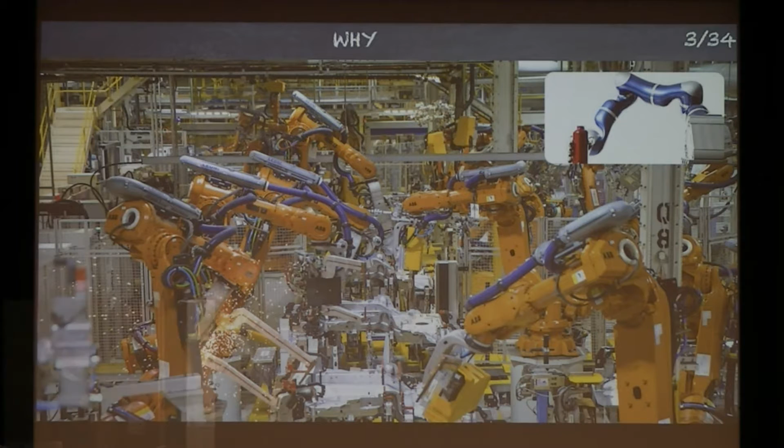Just a little bit of motivation. This is very standard and straightforward. Robots were designed to be outside the human workspace, confined within cages and with no people around.

But nowadays, the European community has been certifying a number of robots that can really be installed nearby humans, and we finally share with robots the same workspace.

But still, I think there is a lot of research to be done in order to give robots the ability to be proficient in interacting with humans.

On one side, we need robots able to interact with the environment in a better way, to be able to establish contact in a better way.

But this, I think, is just a way to really obtain robots which are able to physically interact with humans, so that they are able to establish contact with humans in the right way.

And the number of applications, if we solve these issues, are several. I want to cite a few because my approach is a little bit theoretical, in the end, so I think I can decline what my research does into different contexts and scenarios. I sketched up a few there.

Physical nurse, physical assistance from a nurse. I think it's very important considering also aging population.

Exoskeletons are something that are very popular nowadays, and I think that what they lack right now is the ability to physically interact with humans in the right way.

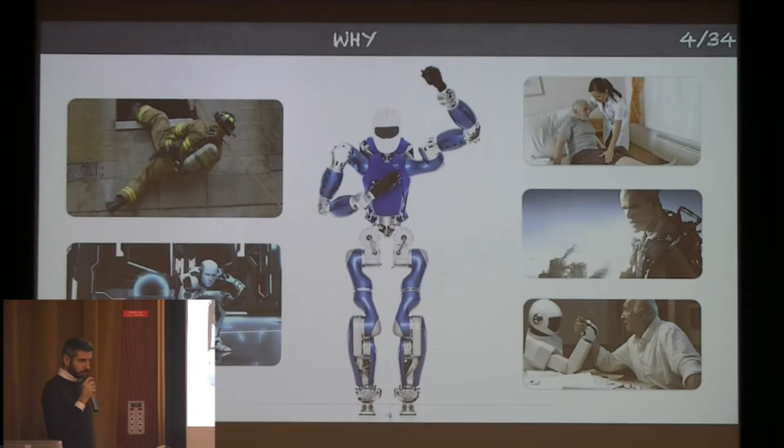And in general, interaction with humans might be the future for a number of applications that at the moment are not possible for a number of reasons.

As a scientist, I've been always fascinated by how humans interact with the environment. The interaction is never pointwise, as opposed to robots. It's actually distributed on an entire surface, and it's flexible, dynamic and compliant.

If you see what happens when you basically run, the interaction with the ground is really complex. As I said, it's compliant, it's not pointwise, it's actually distributed over a surface. The distribution of pressure is very different.

When we interact with the environment, we adapt our control action to the specific environment we interact with. In this case, with flexible trees, we adapt our compliance, our way of moving.

When we interact with humans, it's even more complex. We need to understand what the other person is willing to do. We need to anticipate what the person is doing, and then we need to adapt our control action to this. I think all of this is the core of my research. It has been so far, and it will be in the future.

As a control theorist, I've been always fascinated by how humans are able to control a mechanical system which is very far from what we have in humanoids right now.

Humanoids are very fast. They have feedback loops of 1 kilohertz, even more, 4 kilohertz sometimes, which is definitely much faster than what we have in humans.

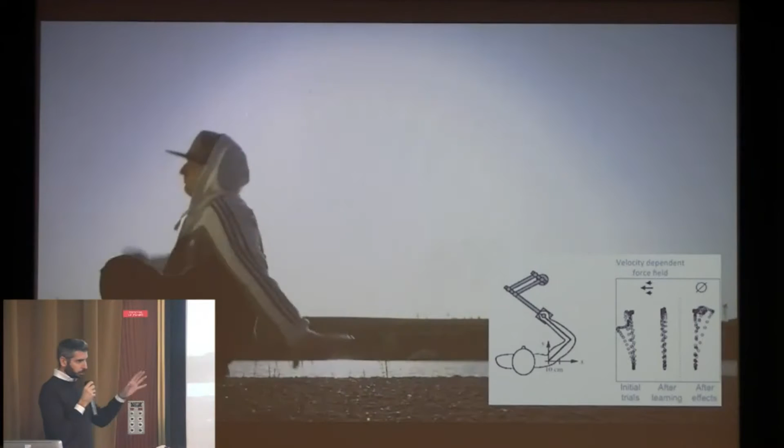And in particular, I have been reading several times a paper by Sandro Mussa-Ivaldi on adaptive strategies.

On the idea that we continuously adapt our models of the environment, and if we change these models, so if we perturb the dynamical models we are immersed in...

...we basically change our feed-forward control strategy. And this allows us to be more efficient in dealing with delays and being able to cope with uncertainties.

Another important mechanism, presented nicely by Burdet, is that we also change the compliance of our body. This might be a way we use to interact with the environment proficiently, and also to cope with very unstable dynamics. These kinds of results are at the core of my research interest.

The main topic of my research is exploiting dynamics. There are things you cannot grasp if you just look at the kinematics of a movement. This might be trivial for some, but not in general for the robotics community. If we want to be energetically efficient, we need to exploit the passive dynamics of the system we're controlling. Dynamics describe things that otherwise are not visible, like exchanges of forces.

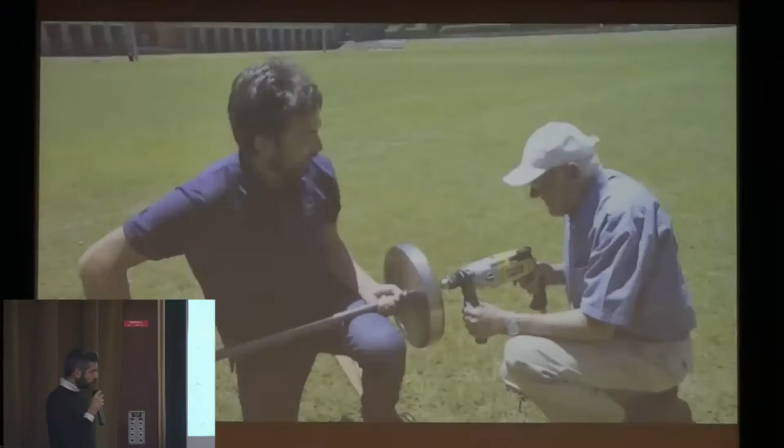You have very nice properties in dynamics. This tough guy is not able to lift this up. But if you just give some momentum to the wheel on the front, you get a very interesting property: the conservation of angular momentum. So this skinny guy is able to do something the other guy was not doing.

What is interesting from a robotics point of view is that if you add inertia wheels inside the robot, you get even weirder behavior. You probably know that a cube is able to stand on a single vertex just with inertia wheels. If you think about humanoid robots with many degrees of freedom and a complex distribution of mass, you can get really weird behavior if you exploit these basic principles.

But these principles are not that easy to see in a complex system like an articulated rigid body system. So in general, I like to think of my research as trying to understand and model the interaction between two agents. That's a very broad and general topic of research that can be specified in different situations.

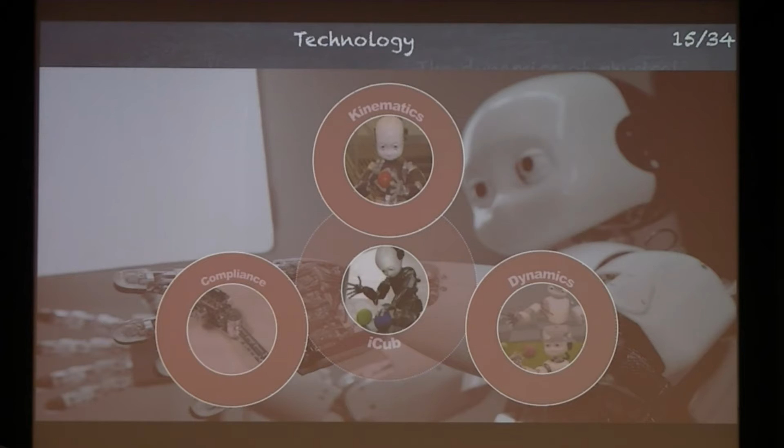In terms of technology, I've been developing the iCub, the humanoid robot you see over there, and I've been contributing to different things. At the beginning, I was mainly concerned about kinematics, the ability to plan movements in the kinematic space. But very soon, the community switched to the ability to control the dynamics of the system, the ability to control forces of interaction, and I've been contributing to it. More recently, the idea of compliance also changed the robot such that we could have compliant actuators in the system. Since the iCub is an open source platform, it's changing continuously, and it's really adapting to the need and to the new ideas in the research community.

I will be very brief on this. I've been working, as I said, on kinematic software that is able to do real-time inverse kinematics on the whole body of the robot.

In terms of dynamics, I've been working on developing techniques for estimating in real-time the forces of interaction and the internal forces, the torques applied by the robot on the environment, the forces applied on the environment, and the torques applied at the motors, and using them to get active compliance that you see represented here.

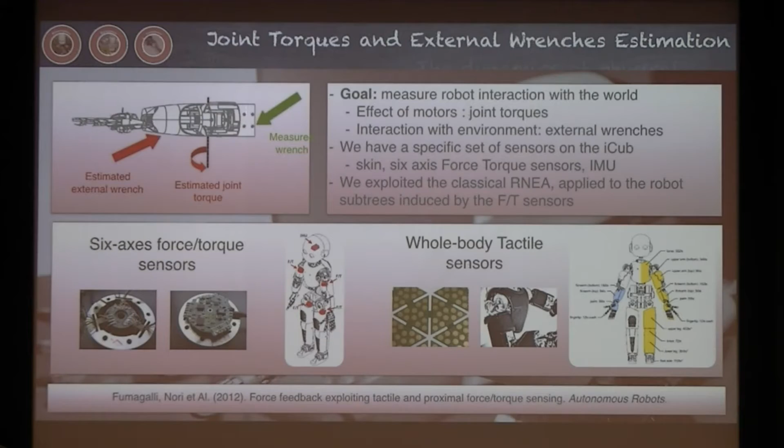We have more or less 6,000 taxels, tactile elements that allow us to have a full description of the interactions. You see here a representation of this capability. The robot is covered with skin, and whenever it's touched, the corresponding area lights up. Whenever Andrea here touches the robot, an arrow represents exactly the force applied on it.

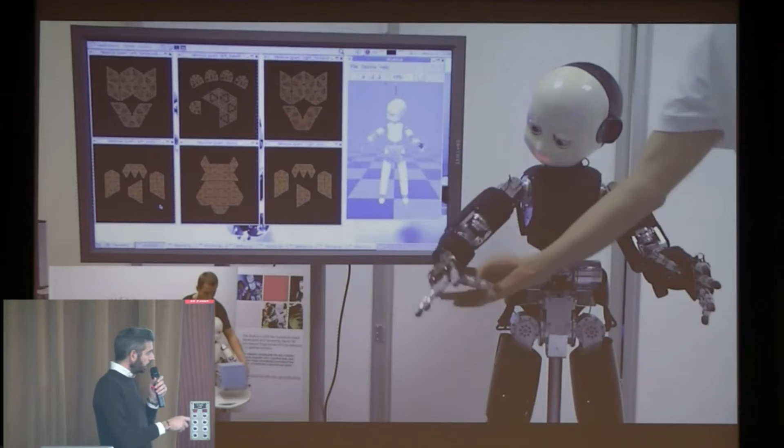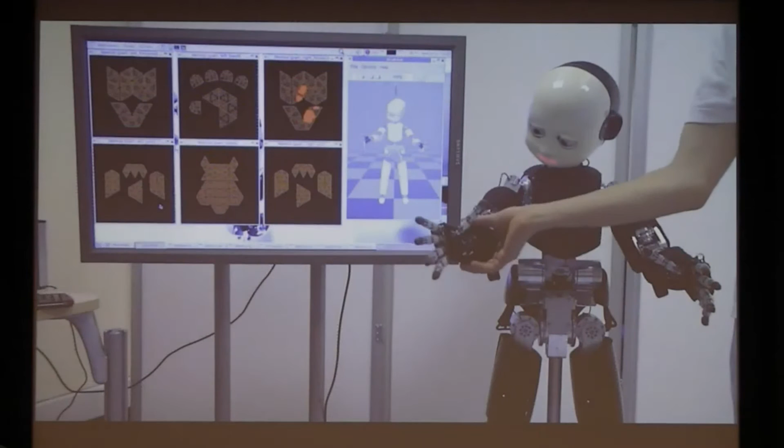We also compute not only external forces but also internal forces, the joint torques. By doing active compliance, we can regulate the force of interaction—in this case, a zero gravity effect—so we are compensating for gravity and letting the robot float as if it has virtually a very small mass.

In terms of software, we've been working a lot with other departments in IIT. I've been working on software for modeling and simulating articulated body systems, and interfacing them with different software. I'll be very brief.

We developed a simulator on Gazebo that allows you to simulate different robots. Another important piece of software estimates the external forces on the body of the robot. It's important for us to interface this software with a number of different platforms, in particular MATLAB and Simulink, which you see represented here.

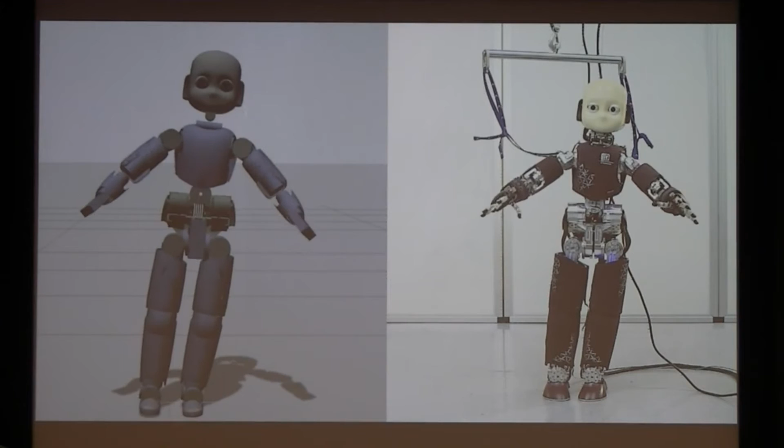Just to give you an idea of what we've been doing, here are recent results on inverse dynamics control of posture, simulated and on the real robot. On the left-hand side, you can simulate this yourself—go to the website, follow the instructions, and you should be able to run this simple demo on your PC. The other one requires an iCub, which is sort of expensive, 250,000 euros, so it's not that easy.

But you have one here, so you can see these demos in these days, because there is a version of the iCub here in Toulouse today, since there's a review meeting of a CoDyCo project next week.

In terms of science, I'll again be very brief, but my research interest is guided by control, and I've been working on modeling articulated systems, controlling articulated systems, and estimating articulated systems.

In the history of my research, I've been working on dealing with rigid contacts—the idea of having an articulated system interacting with a rigid environment. Going back to the equations, same as before but simplified, I'm considering only the robot interacting with a rigid environment, a very simple case that nowadays we can solve. The results are represented here.

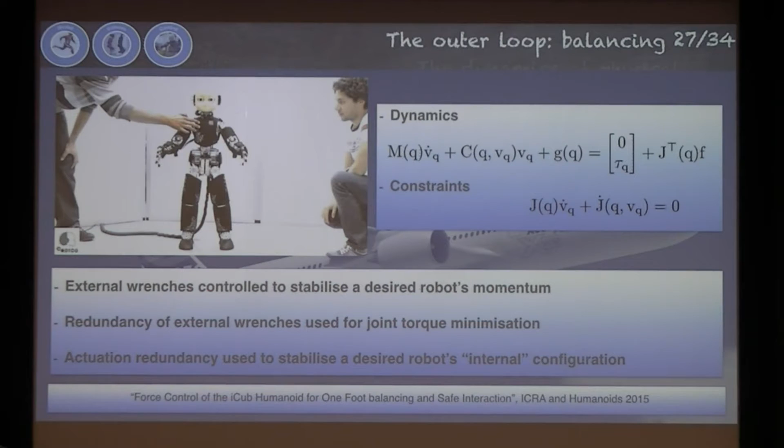I will have a video. Also this one, probably can start—let me see. No? Oh, yeah.

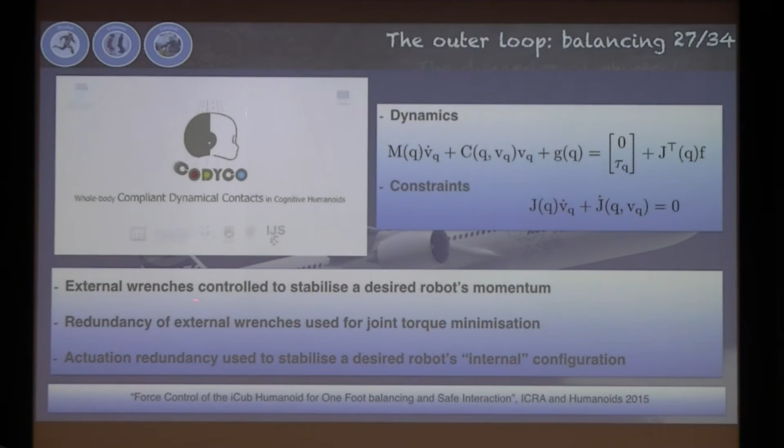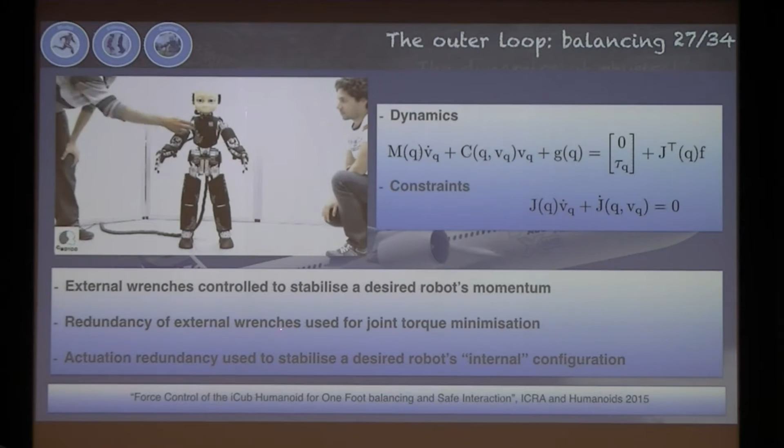The idea is to have hierarchical control. You first control the external wrenches, the contact wrenches, in order to stabilize the desired momentum of the robot. The redundancy of this task can be used to control the posture of the robot, and finally the remaining redundancy is used to minimize and stabilize the desired internal configuration.

You see, as you start doing fast movements, you begin to see the exploitation of basic dynamic rules, like the conservation of momentum, in this very simple example.

This is just to show you that now we have very fast and dynamic movements. We'll see the same video again, but this is kind of fast, in my opinion. I bet I'm not able to do this myself—I can try, but I will fall down.

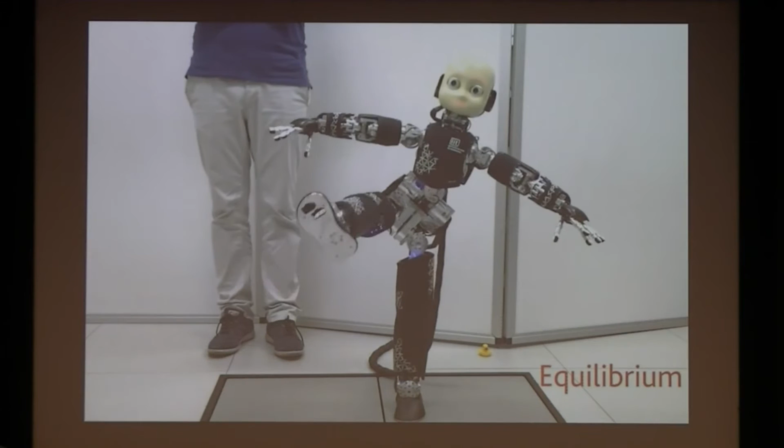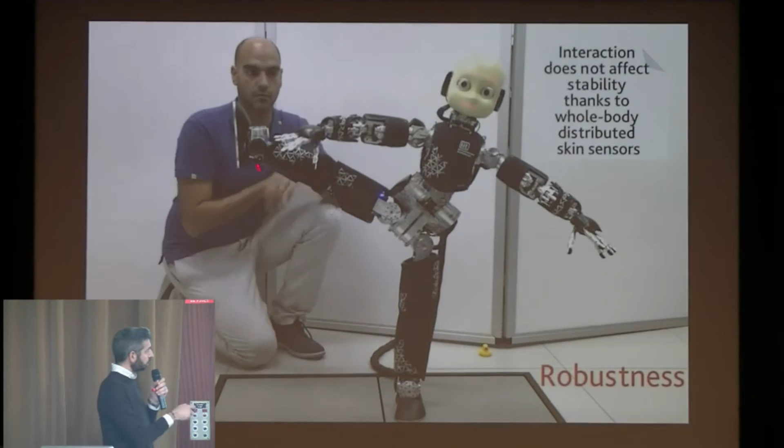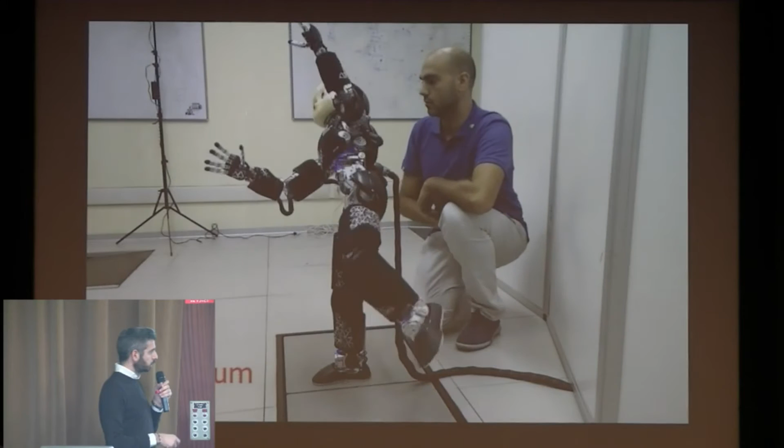This is fully torque controlled. You'll see that when the robot stops, Daniele in the background will push him, and because the robot can detect whole-body distributed contact forces, it's able to maintain balance by including in the control action the effects of the forces Daniele applies. Equilibrium is maintained by estimating the interaction force and using it to control the centroidal dynamics of the robot.

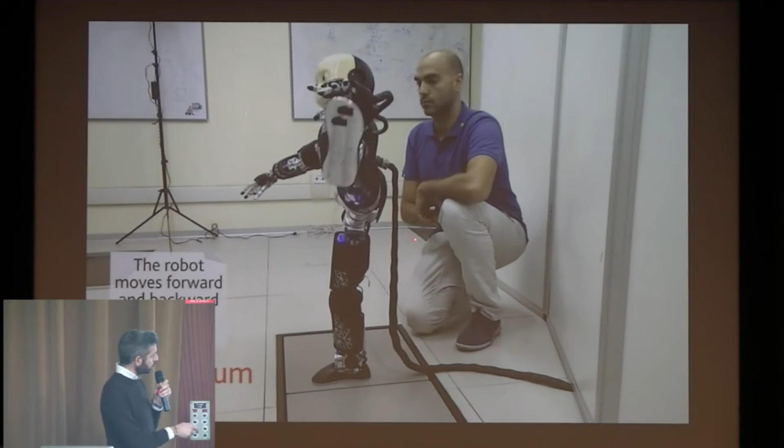In practice, this means controlling the position of the center of mass plus the orientation of the whole structure. You see a nice compensation: when the foot is brought forward, the upper torso is brought backward in order to maintain balance.

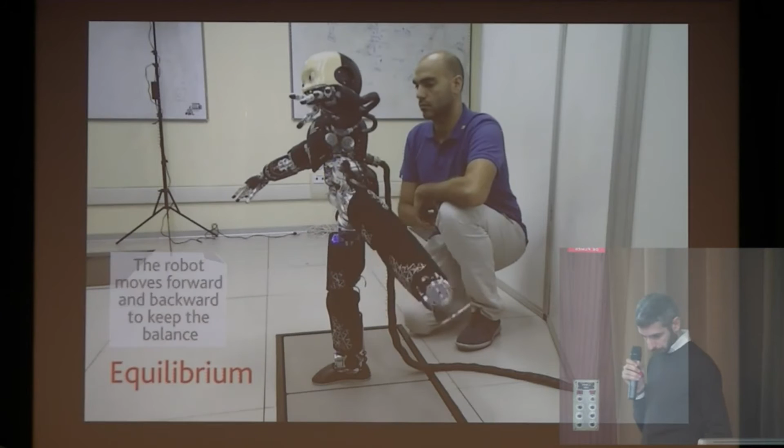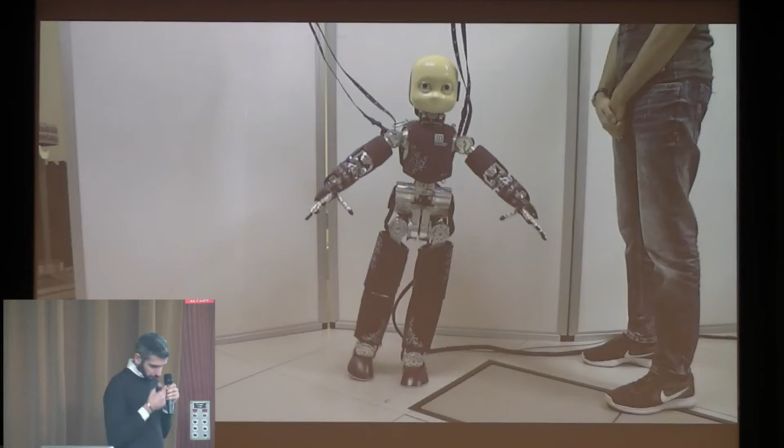At present, I'm thinking about moving from rigid contacts to more dynamic contacts. So in this case, you see, for example, contacting with a soft environment, not a rigid one, or interacting with an object that has its own dynamics.

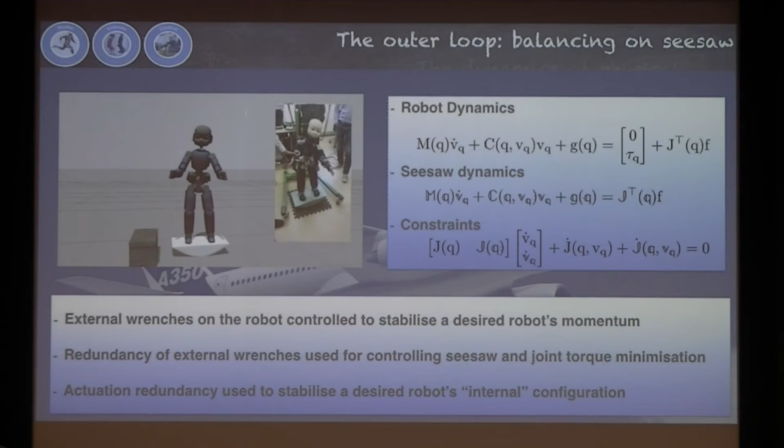But you see here the robot, again, fully torque controlled, inverse dynamic approaches, and in this case, interacting with a seesaw thing, which is quite an unstable task. Indeed, you see it's not really perfect the way it's interacting with the seesaw. We are still working on it. But I think we need to start thinking about how to deal with this kind of system, and how to choose the torques of the robot, so the actuation variables, in order to maintain a stable configuration on a seesaw. Humans can do this very easily, by the way, but you can imagine.

What about the future? I want to move towards the most complicated situations, so interacting with humans. So if I go back to, I go back to the original system that I wanted to describe.

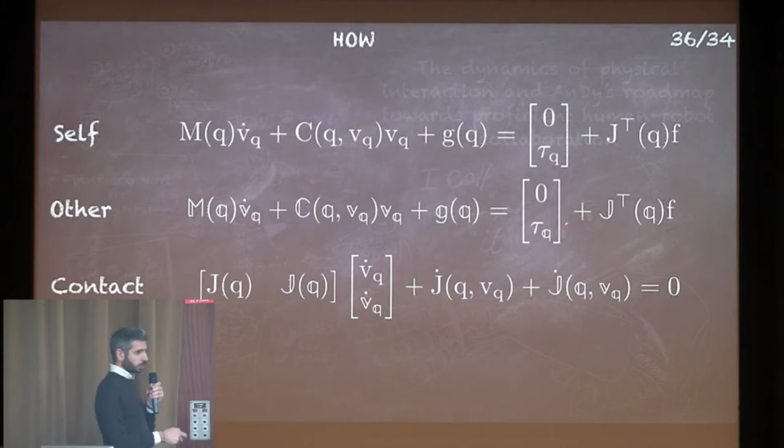The very difficulty about controlling this kind of systems is that they have their own intention. And of course, intention is a big buzzword. But you can understand this buzzword by saying that they're applying their own muscle activation, and this will change the interaction. No matter what, the two mechanical systems interacting will change each other by selecting their control actions. And this is very, very complicated from a control point of view. Before I've shown you that we have been working on things that do not have any internal will, any internal torques, so you can model everything and try to control these systems, but in this case, this is very complicated in my opinion.

Why is it complicated? Well, because as I said, if we want to interact, we need prediction. We need to be able to predict a little bit, not too much, maybe 200, 300 milliseconds. But we need to know what the other partner will be doing. And this is, I think, very, very difficult nowadays with robots.

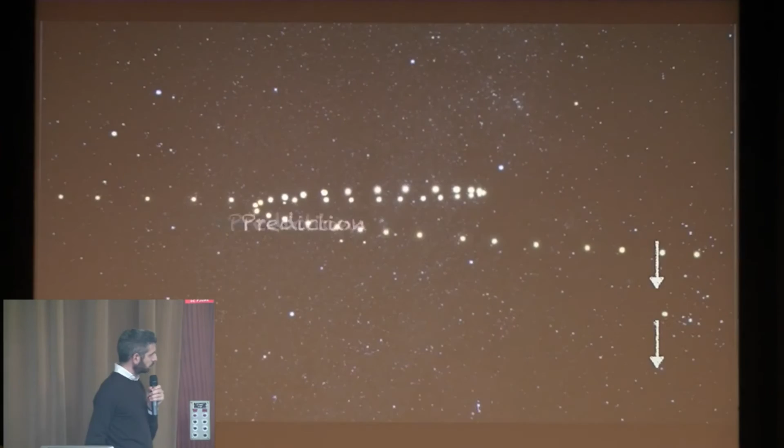What do we need for doing prediction? Oops, this was not intended. I don't like animation, sorry for that. Oops, yeah. Let me do this because I didn't want to put animations on. Okay.

Sorry, I didn't want to have animations.

But to have prediction, you need models. I took the example of the solar system: if we want to model the orbits of planets, we need to predict their position, we need models of how the planets move. But to get these models, we need observations of the planets.

This is trivial for a research community like ours, but maybe it's not often explored much, especially in certain problems. To do observation, we sometimes need new technologies. That's what I'm trying to do now in the context I was describing.

If you go back to the videos I've shown you, the robot can deal with external perturbances, can sense forces applied to its own body, but the robot is not aware of what the person is doing, not aware of the posture of the person, not aware of the forces the person is applying in their own structure.

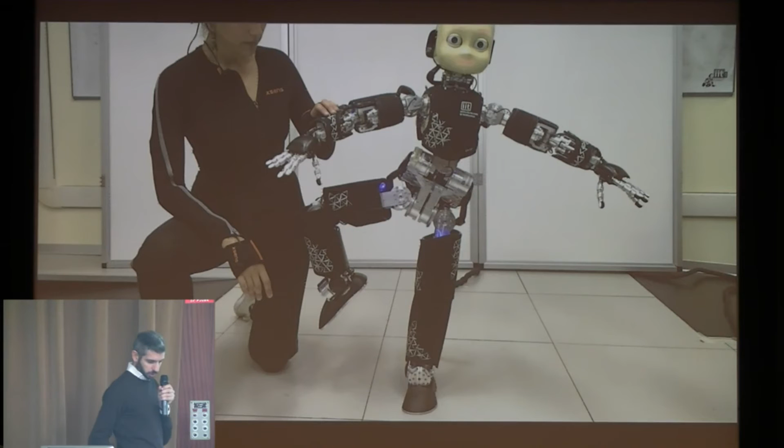This idea will be funded for the next 4 years in a European project called AnDy - Advancing Anticipatory Behaviors in Dyadic Human-Robot Collaboration. The idea is the one sketched here.

You see the robot, and a human wearing a prosthesis here in particular. The human is wearing a suit that allows the robot and the prosthesis to know what the rest of the interacting system is doing, as a first step toward reactive behaviors.

So I've been working on a technology, which you see here, to monitor humans while they interact with the robot. At present, we are working on estimating the system - the dynamic parameters of the system - and real-time estimating the torques at the joints of the person.

More in general, within the project, we are thinking about building models of the interaction and trying to anticipate, maybe 200-300 milliseconds, what will happen next. With application, as I was saying at the beginning, in exoskeleton control and physical human-robot interaction, as you see here.

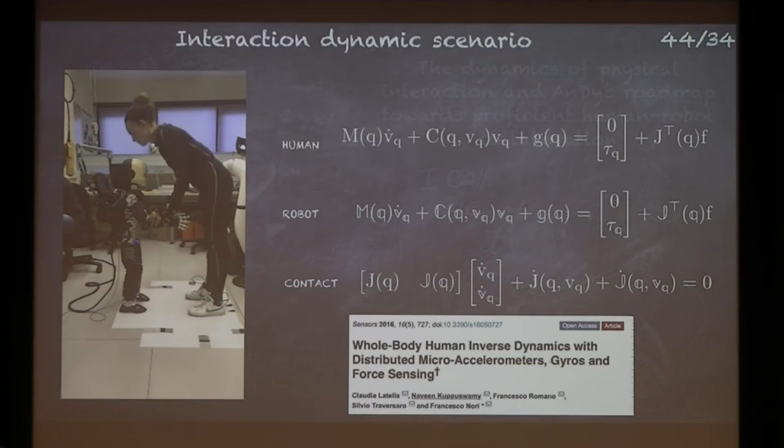If you have questions, I'll be happy to answer. I had a counter here that says 30 minutes have passed, but that's okay. If there are questions, I'll be happy to answer. Ah, okay, I didn't know. But I'll be happy to answer.

The results you present are very impressive in terms of the quality of the control of the dynamics of the system. But I was thinking, why is there no investment in walking? Is this a limitation of iCub? You've shown a lot of very impressive dynamical motion and nothing about walking.

Yeah, why? I like to answer this by citing the research done by Raibert at MIT and later at Boston Dynamics. He started with hopping machines because he had an idea in mind. If you see the recent videos of Boston Dynamics, the humanoid walking around, I think the basic control principle behind those machines is really the same as in the hopping machine. But it took 20 years to actually get a walking machine out of the hopping machine.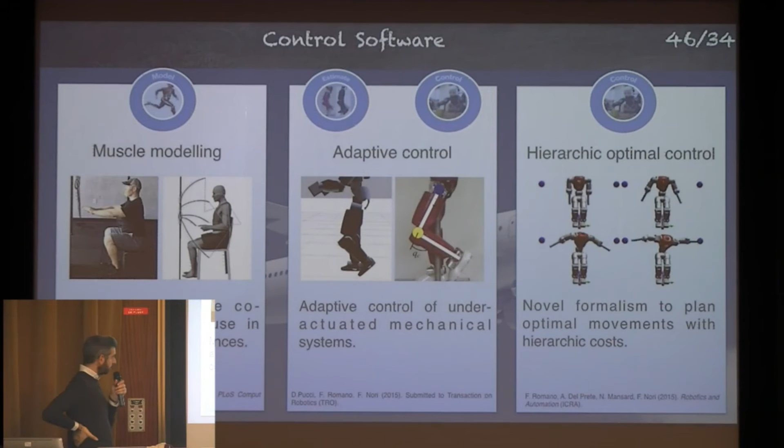I've been working a lot with motor control when I was in the other department. Nowadays it's a little bit less, but still the ideas are in my mind about how to represent movements. I've been looking in particular at the passive dynamic properties of muscles as a way to achieve properties that are not currently available in robots. And I came up with a prototype, actually a patent as well, of an actuator that replicates the equilibrium point hypothesis by creating an agonist-antagonist structure, and on top of that, the ability to co-contract in a way that you stiffen up the structure.

I really think it's really promising in terms of control. I called the properties of this system passive noise rejection, with the idea that with this actuator you're able to reject disturbances without resorting to feedback delays. So it's sort of the idea of muscles that I was describing before. This is still in my mind. I think for certain very dynamic movements, it will be very efficient to have these kinds of actuators, also because they are compliant and variably compliant. So I really believe they are fundamental to create dynamic behaviors. At the moment, the technology is not ready - we need to invest a little bit more, maybe 2 iterations of this - but it's definitely very, very important. I think looking at motor control theories and how we can describe the passive dynamic properties of muscles and the musculoskeletal structure will be very beneficial for the next generation of robots.

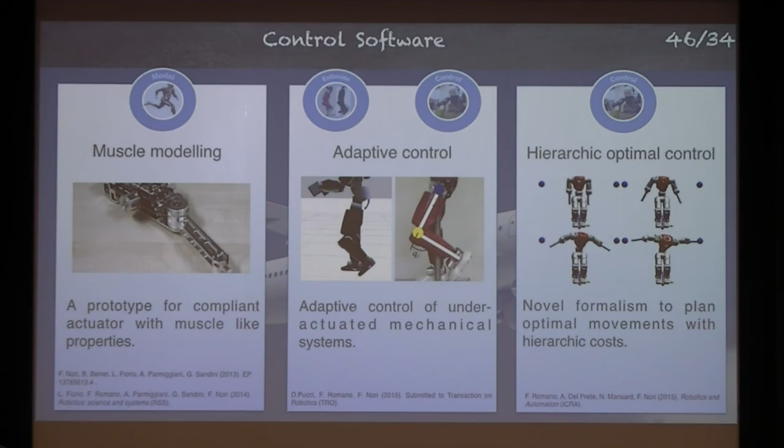I was just wondering, you said the prediction horizon of a few hundred milliseconds is sufficient. If you think about interactions between 2 people, I could imagine that even for individuals, there's often much longer prediction horizons in human behavior. Are you planning to investigate this as well for interaction with robots?

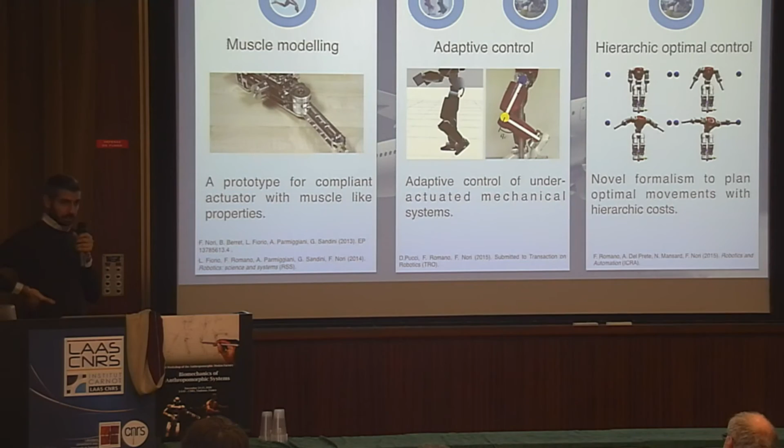Yeah, I was trying to be maybe realistic within the scope of the project. It will be 4 years. Right now we anticipate probably minus 10 milliseconds - we're not anticipating alone at all, we are delayed by 10 milliseconds in perceiving things. So I think it's very optimistic to think about 200-300 milliseconds. Maybe in certain actions like walking it could be much easier because it's repetitive, cyclic, and has a number of nice properties. It could, I mean, I don't know how much we need, that's for sure, that's a good question. Maybe I'm not even the right person to ask because I'm a control theorist - I'll be very happy with 20, 30 milliseconds. So, but yeah, of course, it's something to be decided and to be investigated.

In terms of basic science, I think those problems are very intriguing, very interesting. I have two remarks. First, if you want to address this interaction, you not only have to address how a human moves, but include how a human interacts in your model. Second, you try to get a model in the machine which is anticipating something that is itself maybe anticipating. This is really curious stuff. I agree, it has to do with the fact that my own action as a self can influence the reaction. So that's definitely very complicated, I have to say.

But humans do it. So starting by doing measurements on human-human interaction, we could think about how this happens, the idea of leader, follower, these kinds of things. And there is literature. I was presenting here today only what I want to do, but a lot of people have been doing interesting stuff. I'm not saying I'm the only one considering these problems, and this is very interesting.